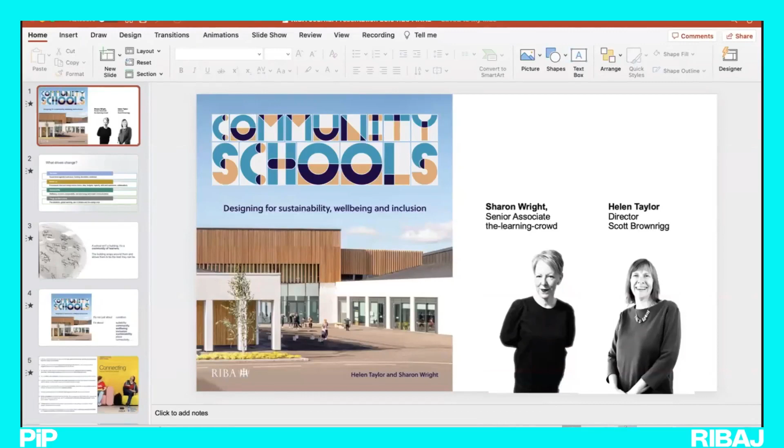Starting off today, we'll be speaking to Dr. Sharon Wright, Senior Associate at the Learning Crowd, and Helen Taylor, Director of Practice at Scott Brownrigg. Helen Taylor has worked in education design for more than 20 years and loves engaging young people in the built environment. She's passionate about sustainability, inclusion, health and wellbeing, and has worked with the RIBA, the Department for Education, and Schools of Architecture to drive design standards and communicate the importance of education spaces. She shares practice research via Scott Brownrigg's Design Research Unit and other DfE publications. And she's working on the DfE's Design Code for Schools and Colleges and is also a proud mum.

Oh, sorry, my list has gone. Hold on a moment.

Sorry about that. And Sharon Wright has spent 20 years working with education leaders, architects and contractors in the development of new learning environments nationally and globally. She's got expertise in creating the vision and design brief, engaging users in the process to make them stakeholders in design. With a background in education policy and organisational development, Sharon is a Doctor of Education from King's College London, with research interest in the history and policy context of community schools. She's a Fellow of the RSA, a UK Executive Committee member of the British American Project, a RIBA affiliate member, and on the board of Bees United, the Brentford Football Club Supporters Trust.

Bit of a plug there.

They're here today to discuss the co-authored book, Community Schools: Designing for Sustainability, Wellbeing and Inclusion. And I look forward to seeing the presentation.

Good morning, Sharon and Helen. Helen, I understand you've had a few tech problems this morning, as I indeed seem to have had. So I hope you're both there. Are you there? Yes, absolutely. Hello, good morning. Yes, we're here.

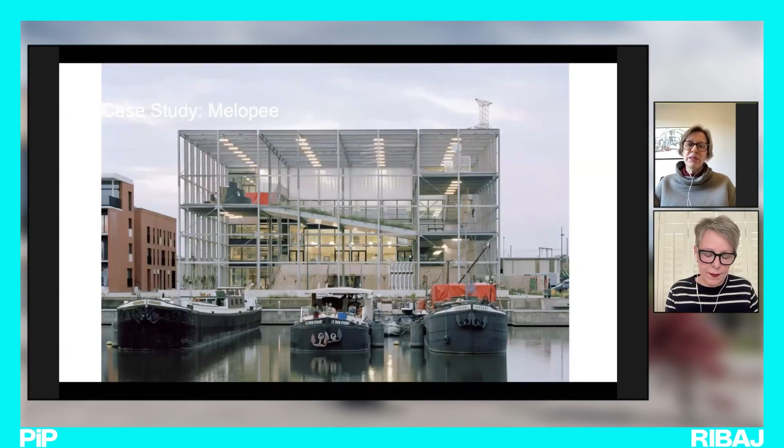We've also included some international case studies. This one you might have seen published in a number of architectural journals, Melopee by XDGA Architects. It's part of an OMA master plan in Ghent, and the first community facility of any kind in this particular area. The architects have created a really beautiful, dramatic, multi-story educational space. They had a very tight site to work with, so both the internal and external spaces are stacked, but they've been able to create a very visible community hub for this new development.

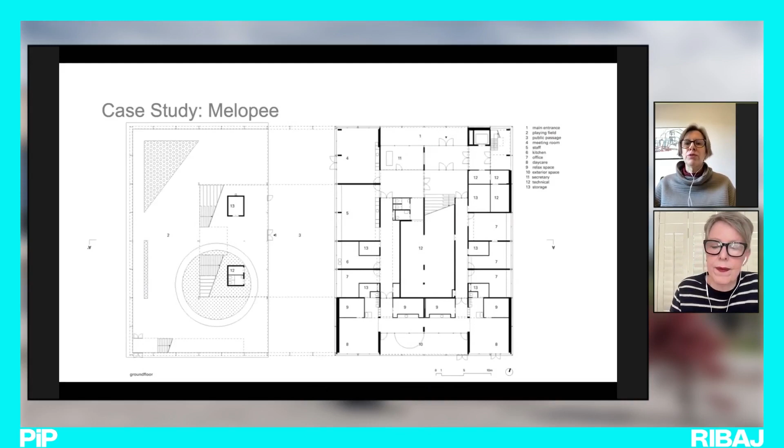They're seeing this as something designed to welcome the community in, to the extent that there's actually a public footpath running under the building, which they want to use as a jumping off point to develop the community within this area. You can see a very simple arrangement of spaces, very flexible. The architecture isn't restrained by the need to have a number of very simple, flexible spaces for the school to operate in.

At a very different scale and kind of environment, Silver Birch up in Argyll and Bute. As Sharon said, she's been working a lot with the authorities in Scotland, and one of the things they've really invested in is outdoor learning. There's a really important role for designers here in terms of creating these positive spaces for young people.

I think one of the lovely things about Silver Birch is that their vision is very much about seeing the child as a vital part of the community, making sure that children and their families have the opportunity to experience nature, to push boundaries, to experience risk as well, which is something that's quite difficult for schools to manage. But I think young people need this more and more, particularly over the last few years. This engagement with nature has a really positive impact, and I hope we'll see more of these kinds of spaces.

Sustainability is absolutely fundamental and weaves throughout the book. We're looking at sustainability as a whole, considering all of the UN Sustainable Development Goals. The current DFE standards are really starting to push this agenda in terms of climate change, and you can't separate energy use and carbon from the other drivers we need for community well-being, connectivity and inclusion. So we refer to sustainability a lot, but we haven't created a standalone chapter on it - we've woven it through because we see it as embedded and inherent in all the themes running through the book.

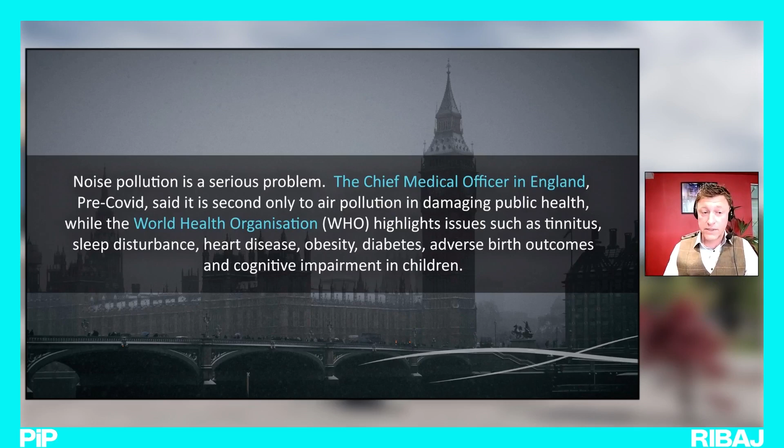Noise pollution is a serious problem. The Chief Medical Officer in England, pre-COVID, said it is second only to air pollution in damaging public health, while the World Health Organization highlights issues such as tinnitus, sleep disturbance, heart disease, obesity, diabetes, adverse birth outcomes, and cognitive impairment in children. Is it any wonder that 44% of teachers in England plan to quit within 5 years?

Anik Hussain, a teacher in Nottinghamshire, said, "Every Monday I teach lessons in a large room with only hard surfaces and hard furniture. The echoes are a nightmare and I can rarely get my voice heard. I always leave school that day with a major headache."

This exemplifies how classroom noise can ruin a lesson even before taking teacher ability, external sounds, or student behaviour into account. But is it any wonder that pupil attention is being negatively affected, resulting in poor behaviour?

One study found, on average, speech intelligibility in just the fourth row of a classroom is a mere 50%. If students can only hear half of what the teacher's saying, how can they be expected to learn and retain information? If they can't hear what's being said, it's a long time to sit without getting bored, resulting in increased unruliness. With school class sizes rising, it's likely this problem's only going to get worse.

The role of acoustics in architecture is not just about achieving optimum levels of sound. With the right acoustic solutions in place, it can actually enhance the way people interact with each other and the space around them. I'll give you a great example.

After spraying a multi-purpose school, sports and dining hall with our SoundSpray product, the head teacher, delighted with the result, reported that they'd actually been throwing away less food. It seems the hall was such an unpleasant place to be, the kids were leaving food to go and play. The introduction of SoundSpray gave them a relaxing, comfortable place to interact with their friends whilst eating. This in turn had an impact on their social development and gave them the energy levels required for concentration.

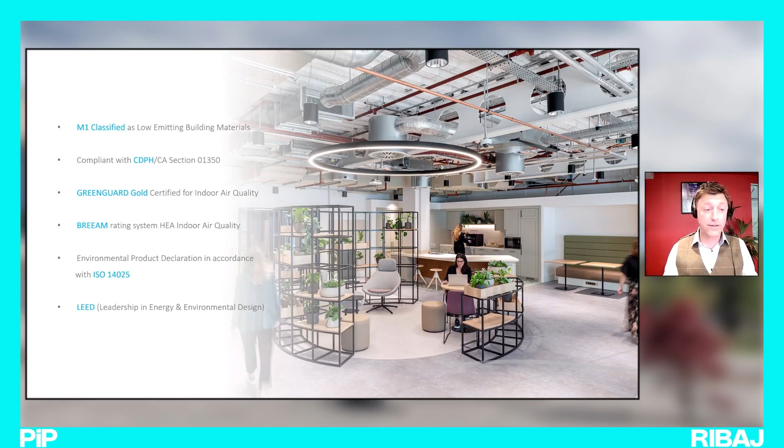The emissions of the products used in a build are also becoming increasingly important, with more certification systems dedicating entire sections to it. Our products are M1 classified as low emission building materials. They're compliant with the California Department of Public Health. They're Greenguard Gold certified for indoor air quality, also BREEAM's rating. They have EPDs and they contribute up to 17 points towards LEED as well.

Our well-being also depends heavily on the survival of our planet. So environmental qualities are just as important. Our finishes are made from high-grade recycled paper and renewable plant-based fibres with specialist water-based adhesives treated to achieve Class 0 fire rating. The range also contributes towards LEED, BREEAM, SKA, Living Building Challenge and Passive House.

All installations are carried out by our fully trained in-house teams to complete the environmental jigsaw. Oscar Acoustics are ISO 14001 certified. We're also now committed to becoming carbon negative for our entire operation and are being independently assessed by Positive Planet.

SoundSpray K13 was used at the Enterprise Centre at the University of East Anglia. This was an archetype project. It was designed and delivered to achieve Passive House standard and BREEAM outstanding rating. The outside was actually thatched as well, which really did look cool.

The project won multiple awards, including RIBA East Regional, RIBA Sustainable Project of the Year, and also Best Education Project at the BREEAM Awards. SoundSpray K13 was used throughout the building, contributing maximum BREEAM points whilst giving a finish that complemented the building really well.

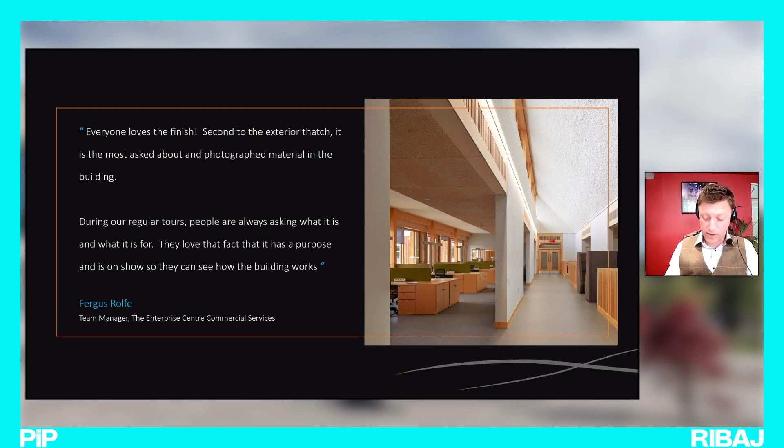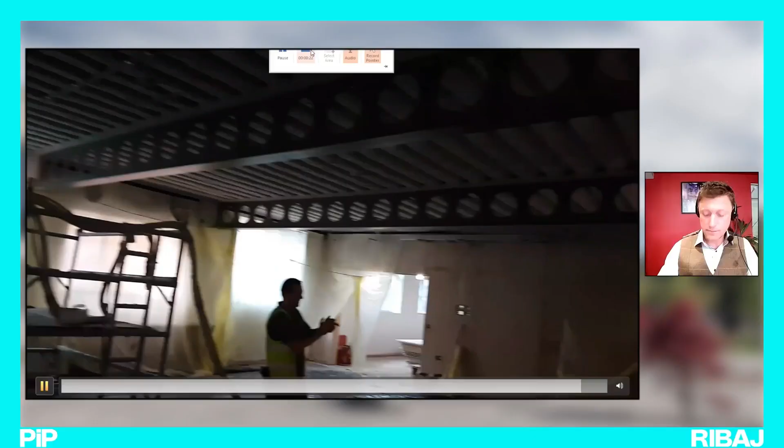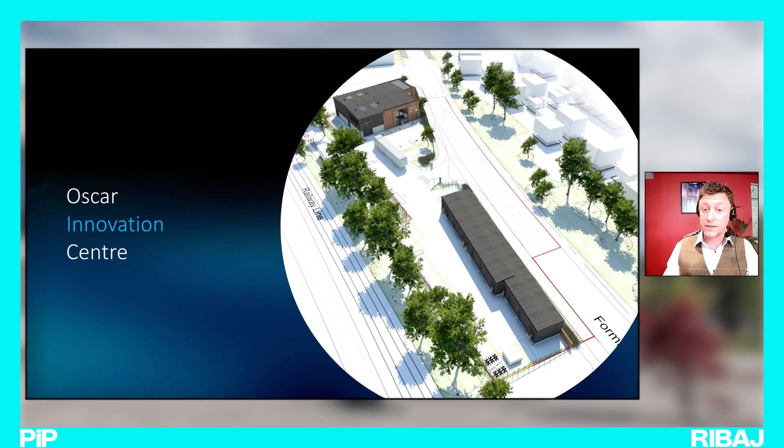So due to the popularity of the product, we've hugely outgrown our current premises and are currently building a new 16,000 square foot Oscar Innovation Centre. This comprises a large warehouse and product development facility cloaked by a brick facade hiding the warehouse from the road and the houses opposite. So I'm not going to go into any detail on this today, as I'm going to save it for a whole other presentation on completion.

But what it does enable us to do, though, is A, meet our rapid expansion needs, and B, create a brand new show home for all our products. So once built, probably around the end of the year, we'd love to invite anyone to drop by for a coffee and see all the products in situ.

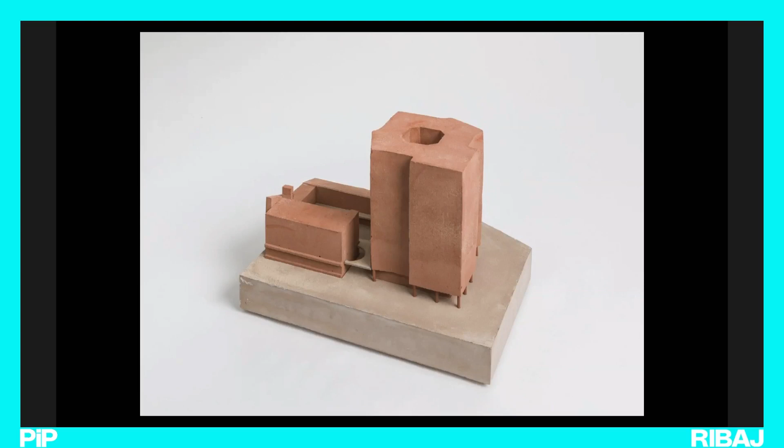But this school is an urban school on Kingsland Road in Hackney. It's actually a hybrid project of a residential building and a primary school, a 350 pupil primary school and 68 apartments. And this is the form. So hopefully everyone can see that. Yeah. Is that okay? Yeah. Okay.

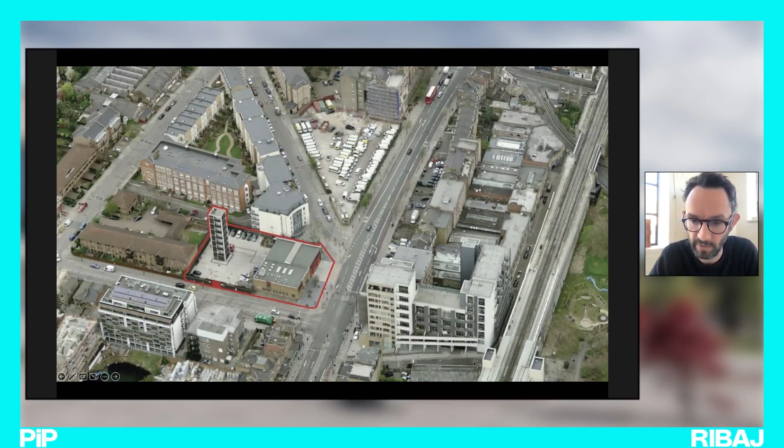And for that secondary school, the founding governors wanted to build a primary school. And when this site became available opposite, they tried to bid for it. But of course, it was a very expensive site. And so in order to fund the primary school, a sister feeder school for the secondary school, they needed to form a joint venture with a local landowner, the DfE, and a housing developer.

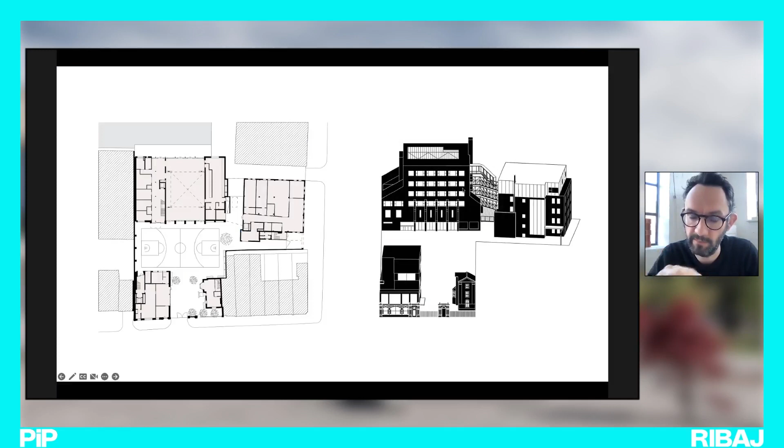So the secondary school gives you an idea of a 6-story, taller, denser urban school environment around a ball court and an existing building, which we connected via bridges to maximize amenity space in these very limited urban sites.

So moving back to the primary school, it comprises, as I say, of a point block tower which fronts onto the busier Kingsland Road to protect from the fumes and noise, and a courtyard school sitting behind it in a more protected environment.

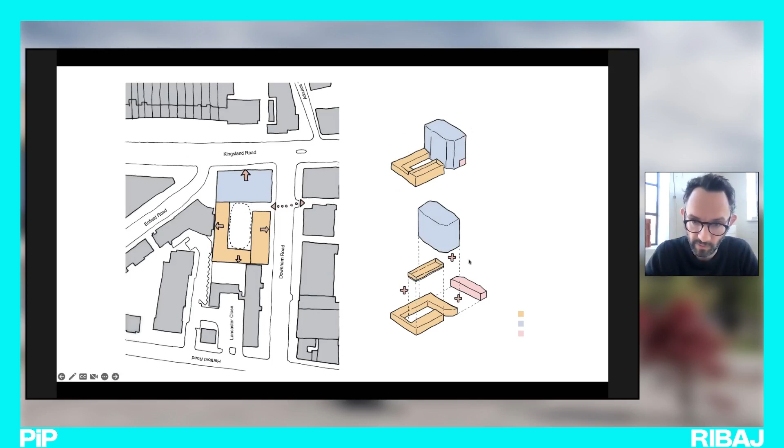Simple principles of the site were to minimize the footprint of the residential building, push it to the edge of Kingsland Road here on the left, and push the boundaries of the primary school to the edges of the site to create the maximum courtyard, basically in the center of the site, a quieter space, and connect across to the secondary school on the quieter Downham Road. And there is also a commercial space fronting onto Kingsland Road.

So very simple principles. But of course, the challenges of this urban site, needing a large residential building to fund it and pay for the site and to maximize amenity space.

And the plan of the two buildings together, you can see a large residential building with the courtyard school, which wraps around and underneath the residential building on 2 floors, providing the fourth side to that courtyard, and the entrance then on the quieter Downham Road between the 2 volumes.

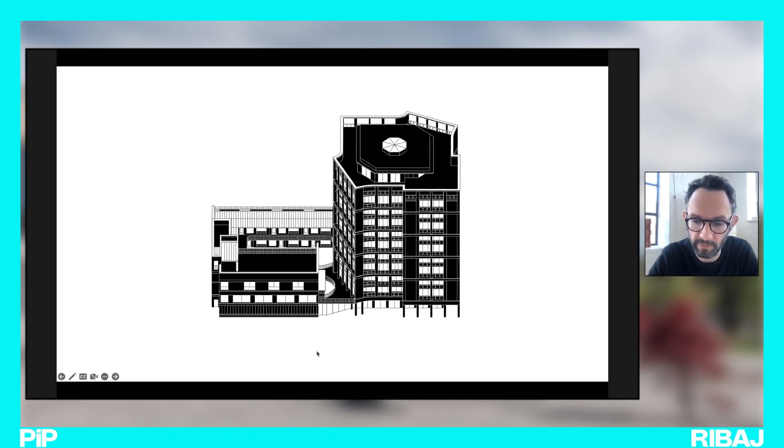So just to talk more about the school itself, the design of the school, here you can see the ground floor has the school's reception, bike storage, all of those things. And you can see the colonnade, which provides shelter for those arriving from public transport, and shade, as well as a more public gesture on the street.

Enter in between the 2 volumes, you see the courtyard, and now you can start to see these outdoor decks, which, as Carlos already alluded to, the courtyard school is formed around the courtyard with external circulation. So the only actual corridor is this, if you can see my arrow, is the back of house to storage and facilities for staff only.

So the entrance here from Downham Road, you can see this wedged space enters into a larger courtyard, and around that there is a covered deck. The hall sits close to the street, which can be used on weekends for community space activities, as well as the courtyard itself. The school was finished in 2019, and halfway through its first term, we had COVID, and so it's re-emerging more as a community building now.

But classrooms, reception on the ground floor. Classrooms are paired, loos in the corners, they're easily accessible and very visible around the central hall, and the kitchen has its own serving space on the street. Double height hall, and then classrooms rotate within the tower.

There's 4 classrooms here. All classrooms are dual aspect with connections to the city, and classrooms along the back wing are top lit down the back on the party wall between, which we'll see in the section a bit later.

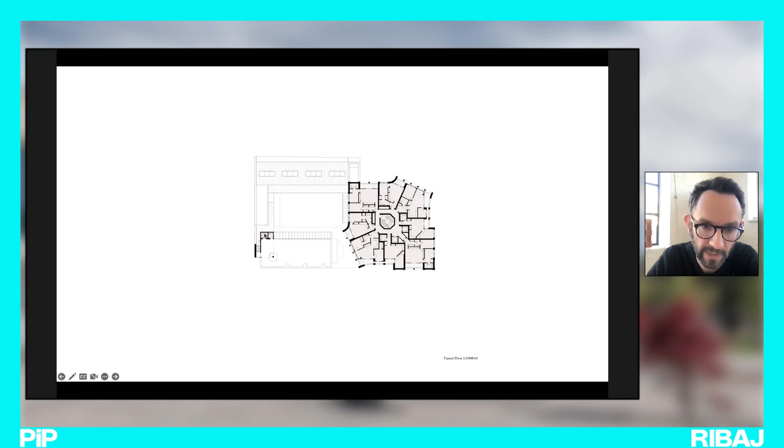And finally, the upper floor has an allotment roof garden, kind of sensory garden space, which there's been various permutations, quite flexible in terms of the curriculum as it changes. On the top level, a solid edge to it, which we'll see in the photographs in a second. So this, the courtyard school around with the residential building on the right-hand side.

So this is the entrance off Downham Road, slightly less busy, where you can see the protective entrance, the arcade colonnade leads from the right-hand side, and a public bench on the left. At this moment of transition for kids from the busy urban city outside to the inside, we collaborated with artist Paul Morrison to come up with a scene of his choosing to create that kind of transition from the outside space to the inside.

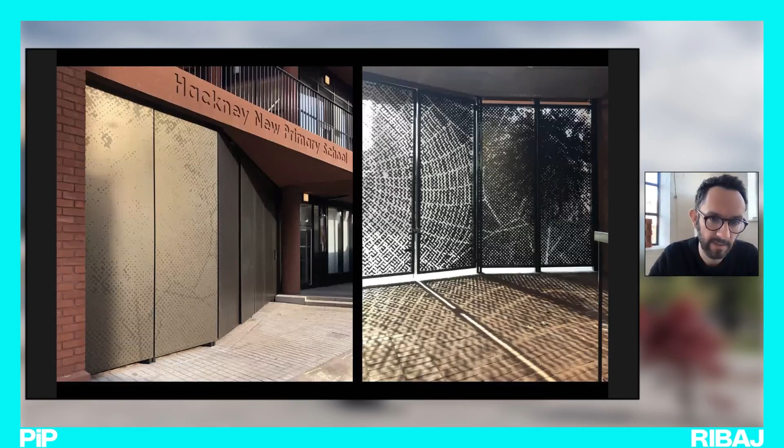So on the left, you can see the quite solid perception of the gate. So it's protective, safe, secure, not overlooked into a school at street level. And from the inside, you can see the kind of light, more in tune with Paul's monotone artistry. And then from the inside looking out, kids are very well aware of what's on the outside street, but feeling protected inside. And this kind of animation of an Alice in Wonderland moment from the outside to the inside.

And all stairs and circulation space are also external. They're covered with external light from above here. And this is what we call the residual apse off of the hall, bringing light from above. And these spaces are not just transition spaces, thresholds between the outside and the inside. They're fully utilized once the school gates are closed. At 8:30, kids use these spaces as smaller breakout spaces from the larger courtyard, in smaller groups. And even between columns, you can see they inhabit every last inch, the challenge being maximizing all sorts of amenity space.

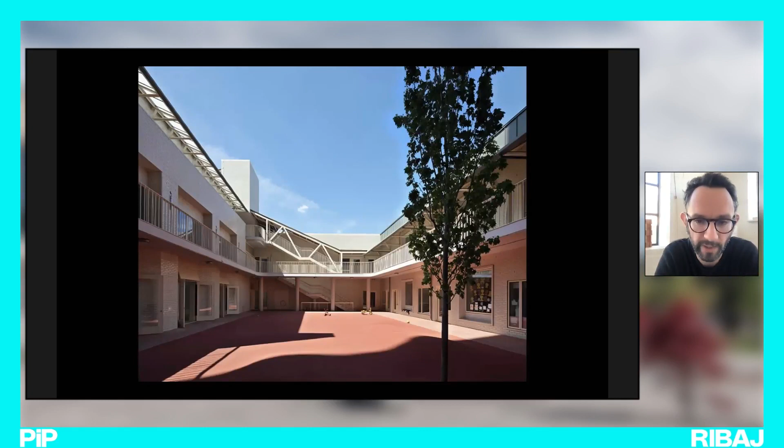So then looking back as you progress, the school occurs in a kind of episodic manner from the street to this entrance court, and then beyond you can see the courtyard, which is a very different character of a lighter glazed, off-white cream ivory brick, different patterns and a more muted color, reflecting more light, but also letting the children animate that space. And there you can see the covered external spaces at ground and first floor level, and the connection up to the roof garden in the background.

And so I'll give you an idea of that different character, different space inside. The staircases are covered external. Kids are refreshed from the classroom, moving to the halls and various other activities, and a kind of nod to the fire station in some way in the expression of these buildings and the canopies.

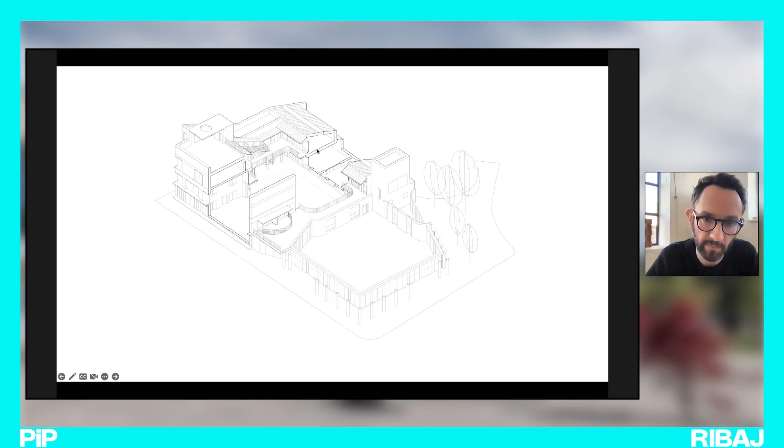So talking about how the school works, you can see in this cutaway section, we have the large hall on the street, as mentioned, the roof garden above, classrooms, and you can start to see the profiles of those spaces. But the school building is sustainable, it's economic. By removing all of those internal corridors, we were able to reuse that area for 4 additional music classrooms. I did mention that the pedagogy at the school was this focus on music and more one-to-one learning, with slightly smaller class sizes of 25, who are taught in pairs.

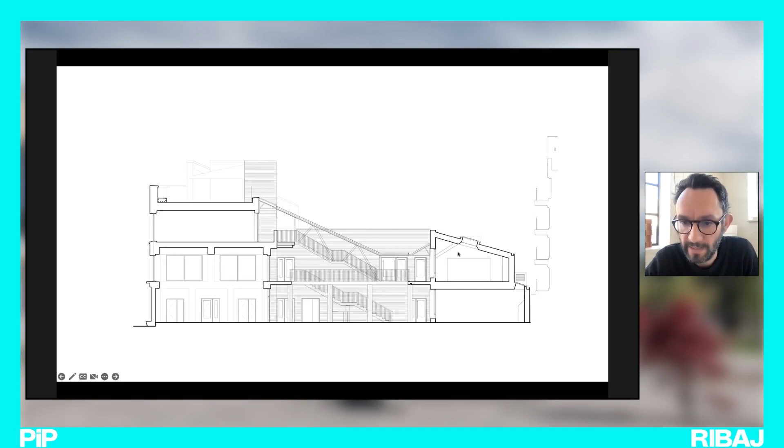But here you can see the clerestory hall, naturally ventilated from the courtyard side at top level here, and actually that hall is ventilated through the school roof. Classrooms are above that, again dual aspect, and those that can't be dual aspect, the reception class here, are top lit at the back, with openable roof lights or north lights to prevent overheating.

So key features of the classrooms and the well-being of those environments are the dual aspect, north lights. They have shading devices, canopies to prevent overheating in the summer, and warm, comfortable temperatures in winter, augmented by MVHRs for those 4 classrooms here on noisier streets.

But one of the remarkable pieces: the external canopies and shading devices allowed this school, at 40 degrees last summer, to be one of the few schools left in London that remained open, and the teachers and head teachers described it as a calm and cool environment. So whilst there's investment in heavier masonry and concrete carbon structures, we feel this is a long-term investment, very low maintenance, very low technology, but performing really well in mitigating climate change.

So here you can see that environment, the shading, canopies. They also serve to prevent overlooking, of course, from the residential building above us. And then breaking that down classroom by classroom, just to talk a little bit about the composition of each classroom. You can see this large picture window, which is the bench set into a wall, a flush window on the right, which is an internal bench on the inside. You have the door and stable doors for teachers to welcome parents in and out of the courtyard without little people escaping, but also, of course, additional fresh air when needed.

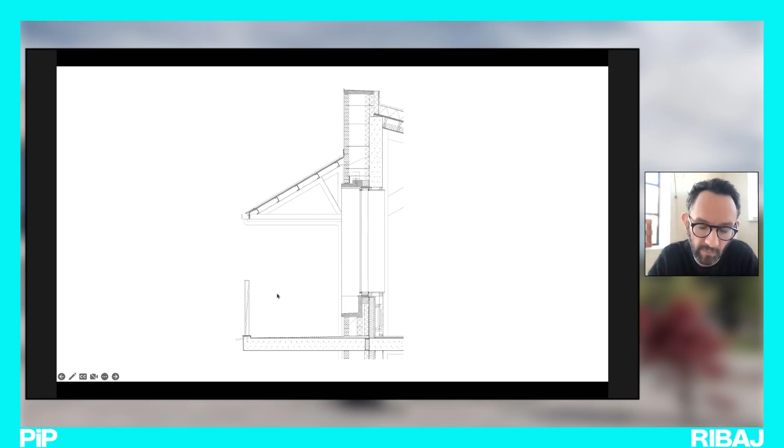Exposed elements, so kids can explore and learn from how things are constructed, but it's very elementally put together, a bit like railway buildings, back-to-back angles, and so forth, and generous walkways where kids can line up or walk past comfortably amongst each other.

This is a cross-laminated timber structure for the pitched roof elements. Most of the other roofs are flat roofs to provide as much additional amenity space as possible. Here, where we're related to the neighbouring courtyard, we have a pitched roof providing natural light from the top.

The back wall is a full acoustic wall. The concrete here is painted to provide a different character of atmosphere to the non-general teaching spaces. Again, exposed concrete, thermal mass, and larger special rooms for that music element.

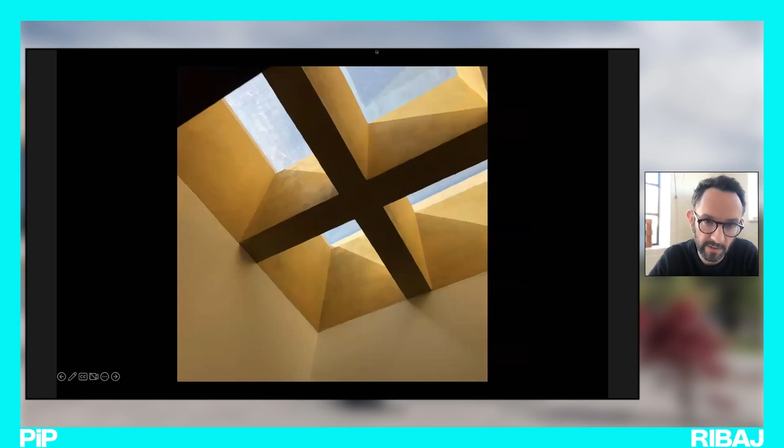This is the roof lights on the SEN rooms. And then this is the roof garden element as you arrive up to the top level of the school, with the residential building in the background.

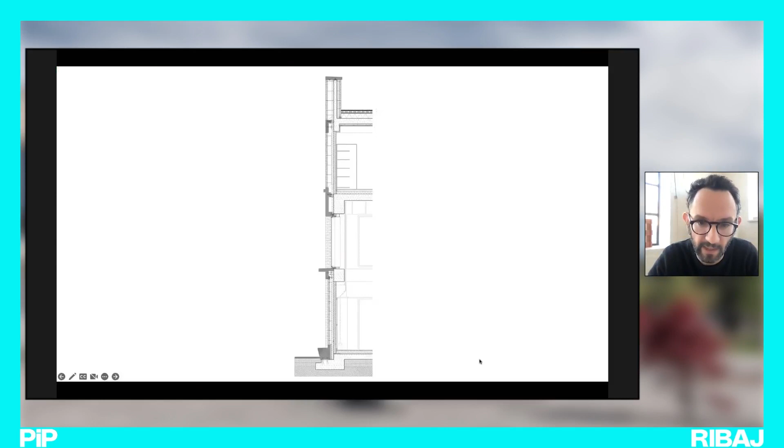So we created this public, very simple moment on the street, a bit like a chapter house, and these kind of almost mini seats along the edge of the street, integrated into the fabric of the building, shading, seats.

There's the detail of that and how people wait and just enjoy this very thin extra bit of threshold to give back to the street in a civic way, whilst the rest of the building has this robust, long-term kind of civic quality, belonging in a very harsh urban environment, but that can take it and need very little, if any, maintenance, but also providing a very important gesture and entrance to a school.

And this is the counterpoint to the bench in the good weather, to have a place for when wet and waiting. And so this is the building in context.

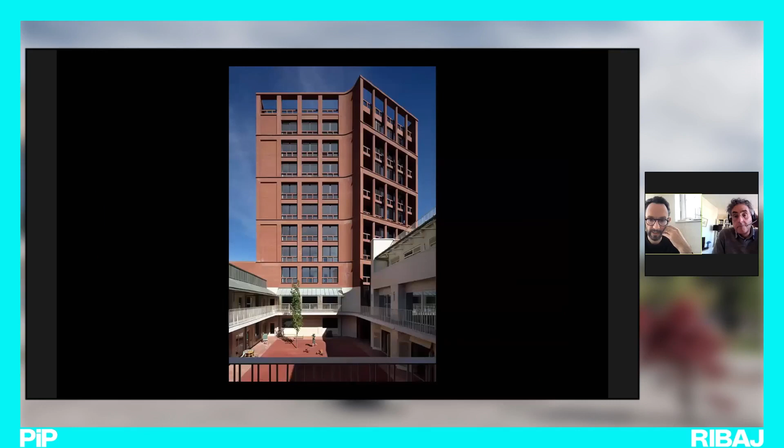You can see the school sitting behind it, quite a large bit, but to show that, I guess, we really feel these things can work in harmony, particularly in an urban environment, this hybrid development, where we feel in that joint venture the school really got a really good fit out, really good quality spaces. Maximizing amenity is the challenge, and relying on other spaces, of course, in the forest schools, etc., and other programs.

But clearly they can survive together in the city environment. And just to finish, you can see that this moment before the gates open, the school really does belong to this community and gives back itself, as well as its use and potential for teaching and adult learning within that space. It certainly feels it belongs to the community. And this is a very outward-looking school in this environment.

So I'll just finish with a quick video giving an insight into how the people who actually use the space work. Thank you.

So we're standing in the courtyard in the middle of the school, and behind me you can see the apartment building. The two things were part of an equation that made both possible. A school was never going to be able to purchase a piece of land of this size, and so here, the housing funds the school. So in a way, you've got two completely different types of buildings fused together in a hybrid.

The feedback when tenants first moved in was extremely overwhelming. People were just really, really happy and pleased because of how the development looks, the layout of the flats. It's a bold design, the red brick and the facade of it. It's very attractive to a lot of our tenants because of how it looks. It's very definitely a landmark.

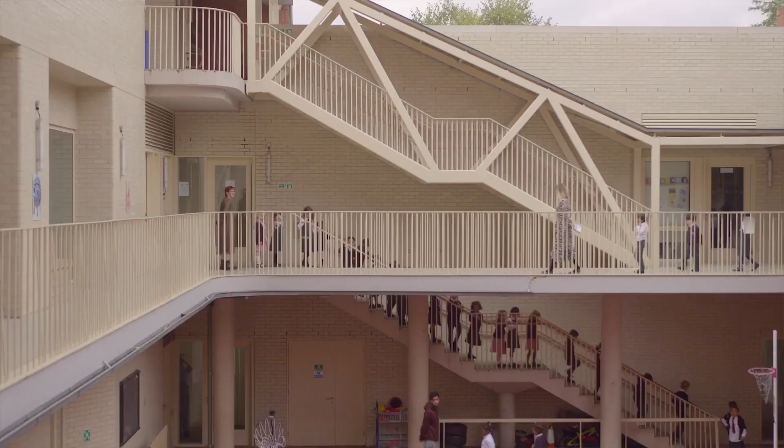Children can have their own space where they can feel calm and secure. There are spaces for them to be able to just sit, reflect, read a book, but then there are also spaces where they can run around. Some of our children do not have access to gardens at home, so for us it's very important that all of our children are connected with nature. They're in classes where they can constantly look outside. They walk out of the classrooms and they're immediately out in the open.

One of the joys of not having corridors is we've got galleries and balconies and open staircases, and they're all places to play. Part of that constellation of spaces - outside every classroom there's a little bench, which allows us in a way to inhabit the wall. Part of it creates a reading space on the inside, part of it's pushed back and creates a bench on the outside. We just imagine that as another place to play.

It's a point in a child's life when they make friends, and as a parent, you make friends through your kids' friends. So we just made a bench, and at the end of the day, parents sit on the bench and talk to each other. So the school is kind of working as a piece of social infrastructure, other than just being a school.

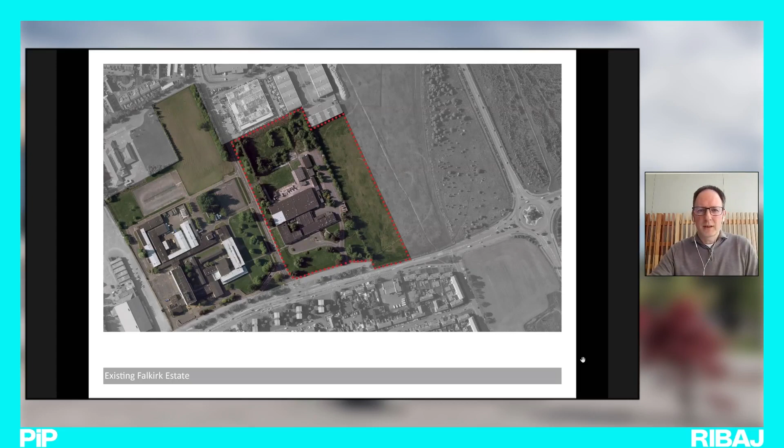The site at Falkirk that we were presented with is split in 2. On the right-hand side, that's the site we ended up building on. On the left-hand side is the existing campus, the existing Falkirk estate, which was developed in the 1960s - a relatively fine building in its time, but had really come to the end of its life, riddled with asbestos, and had developed into quite a big rambling campus.

The site we've got is on the periphery of Falkirk, but Falkirk itself is actually quite a small town, so it's still relatively straightforward in terms of its connections to the town. It's very walkable. The town's off to the west there, with Falkirk Stadium off to the east, and then the views towards the north and the Kelpies and the Ochil Hills, etc., are quite an expansive outlook.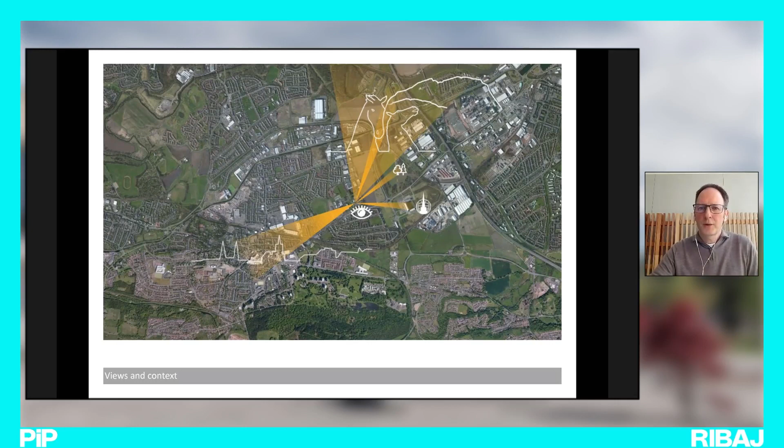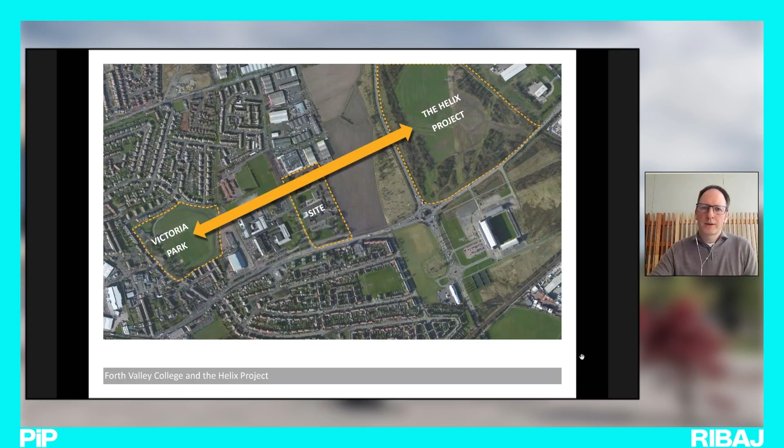In terms of the overall sizes, the Falkirk campus is the HQ. So Alloa specialises in business, Stirling's hospitality and creative industries, and Falkirk is really STEM sciences because of its location adjacent to Grangemouth and the petrochemical industry nearby.

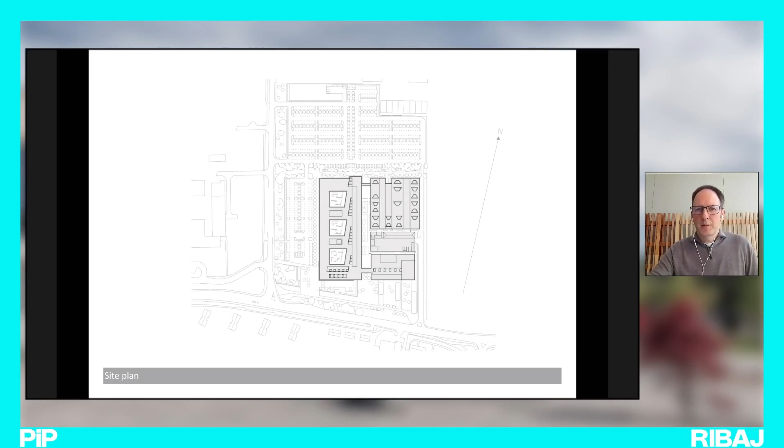And that's how it stacks itself up on site. We brought the building to the south of the site so that it had a presence. The main drag into Falkirk is at the bottom of the page there, from the M9. And in doing that, we engage the southern part of the building with the streetscape, but also provide masking to the relatively extensive car parking that came with the brief, and managed to mask it at the same time by arranging it to the north of the site.

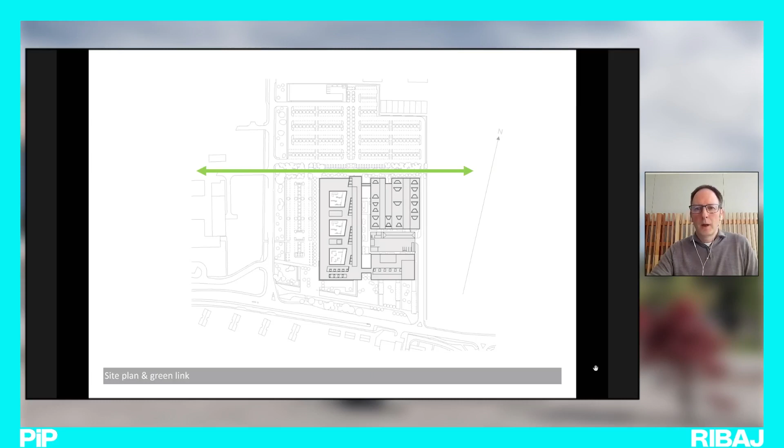And then driving that green link through our site, so creating the first section of that green link in effect for others to link into as the sites develop either side of us. In terms of the ground floor plan, that's how it stacks up. So it's 3 main sections. As you can see, it sort of divides up relatively logically.

So the southern aspects of the building are the public areas. So all of the functions that are to do with community, like the library, the sports spaces, the entrance, flexible learning spaces, all address themselves to the southern end of the site. And so we've maximised the glazing in this area to create that sense of connection to the street and animate the facade, so you can see the activities that are happening, facilitating that with the large precast cantilevered elements that provide solar shading.

So in that part of the building, you've got things like hair and beauty salons that the public are encouraged to take part in and become welcome guinea pigs. Also sports provision, so the gyms are open to the community as well as teaching facilities. And we've also got things like our dining spaces and all of the social spaces that are at the heart of the building. And then just slightly further up, the general teaching spaces.

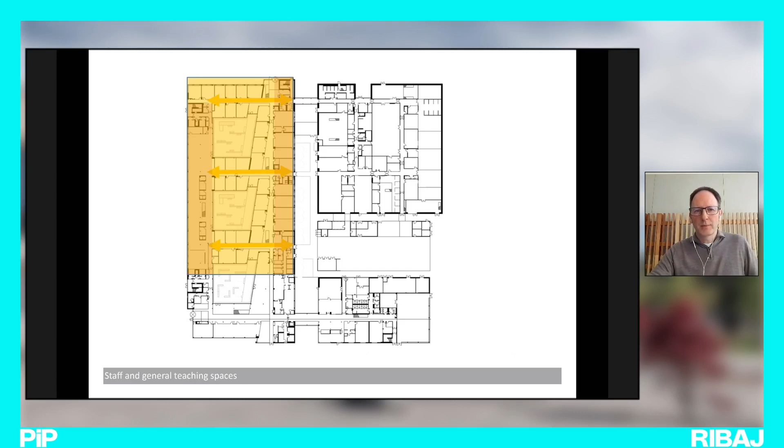So on the very left-hand side, the darker orange stripe is the staff space, which arranges itself over 2 floors. And on the right-hand side, the darker stripe is the specialist teaching, with the general teaching finding its way in between. There's quite an interesting relationship: the students are always able to find a member of staff. So the proximity to the places where people are taught and where the staff work was quite an important driver there to make sure that there's maximum connection. And that's really how that teaching block, if you like, expresses itself.

So it's a handmade Danish brick, and the structure is clad with precast concrete, and the glazing in ribbon windows really to maximise natural light into all the spaces. And some of the teaching spaces that accrue from that. And then again, the workshop areas. So all the dirty, messy, dusty things that workshops tend to be are all coalesced into this building.

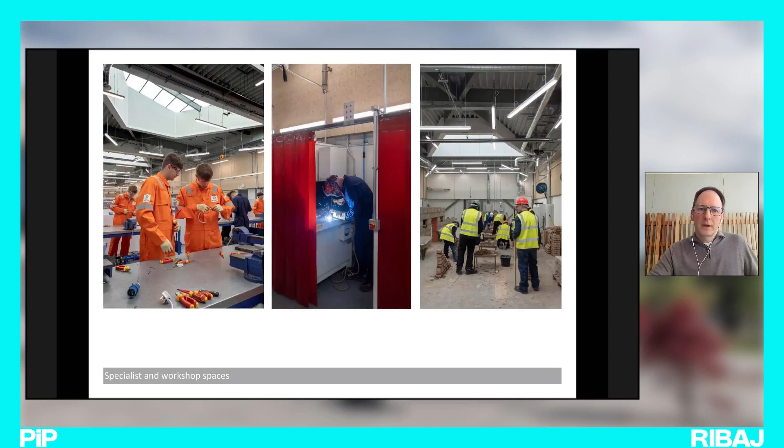And we've given it a kind of industrial character using an anodized aluminium rain screen panel product that clads the workshop and gives it a separate identity. And you've got all the things that happen in workshops like welding and bricklaying, you name it, happens here. As well as serving the petrochemical industry, the flexibility that we have to employ in the building to meet local industry needs is a key driver for the design of the building.

And then dropping in the courtyard so that we've got access to daylight and natural ventilation. The majority of the building's naturally ventilated with a few areas being mixed mode. And then dropping those courtyards, giving the opportunity for breakout as well. And we're quite lucky to have quite a lot of mature landscape as well. So a lot of mature trees that we've managed to retain. We didn't have to take too many trees down to create the building. So we've got a ready-made landscape, if you like, that's bedding in quite well.

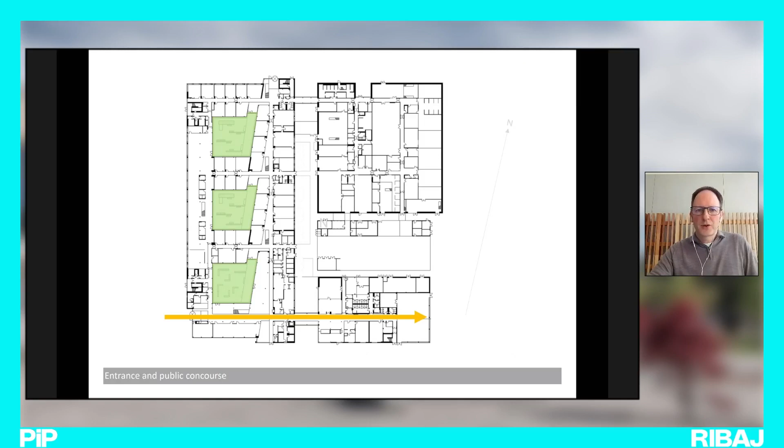And then in terms of the approach to the buildings, there's a main east-west concourse that brings you into the building, and a north-south student street. So just some shots of the approach into the building from the main entrance into a double height entrance space that opens up into quite a voluminous, welcoming, open and airy space that's got light from all levels. On the ground floor there to the right, that's a flexible learning space.

The glass partition there completely folds away and is tucked away so that this can be used for a variety of different purposes. And actually the college used it for a vaccination centre. They had about 300,000 people over their 3 campuses. And the principal was absolutely delighted because it was, he said, the best open day that he's ever had.

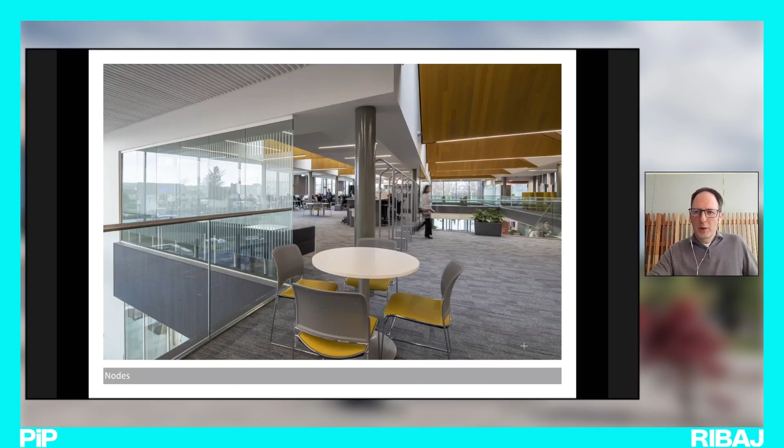And then that north-south student street with breakout spaces, creating those little nodes as you come down the street. Similarly, the groupings of vertical circulation, stairs, lifts and toilets all have the same motif and aid with orientation. And also we're carving openings into the floor plates to bring natural light down. It's a 2-story building, so bringing light into the plan through top-lit spaces is a key motivating factor for the design.

And then effectively borrowing circulation space and repurposing it as learning space so that there isn't really a distinction between class and... It's a relatively well-trodden path, the breakout and circulation; every part of the college really becomes a circulation space. And just finding these little moments, even areas under stairs where you've got a natural little eddy space that we can use for learning.

And then in terms of making, the area that we're in is a sort of alluvial landscape. An area just to the north of our site is called Skin Flats, a wonderful corruption of Schoen Flats. As local tradition says, Dutch merchants came up and were so taken by the beautiful low-lying landscape, it reminded them of home, so they called it Schoen Flats. And we managed to corrupt it into something not quite so beautiful.

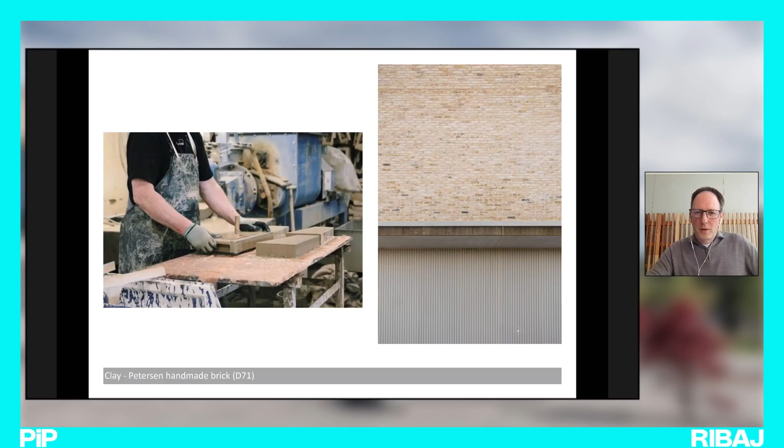But that alluvial landscape is brought through in all 3 buildings, and we quite like the idea of that handmade brick, that sedimentary aspect being brought into the buildings. So choosing a Petersen brick was a really fundamental decision, because we're not doing too much with the buildings. They're quite restrained facades, really. And that runs through into the structure as well, because the structural engineer described the site as a thin crust on top of 30 metres of soup.

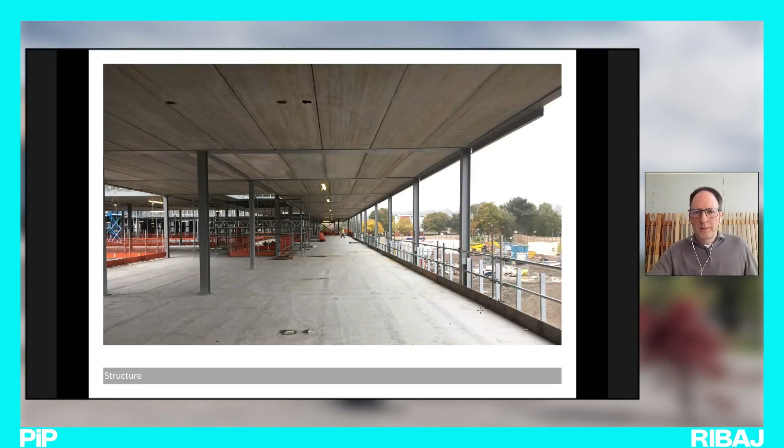But if we were being honest, similar to the project that Noel was describing, this was designed in 2016, and I think our thinking's come on a wee bit in terms of embodied carbon in particular. We're doing a very similar thing in other projects where CLT's been considered as an alternative to the precast solution. It is a very standard kit of parts, a very commercial construction. It's the way we've managed to drive the costs down. We've probably got about £2,500 a square metre on this, which was pretty good. We've managed to enclose a lot of space.

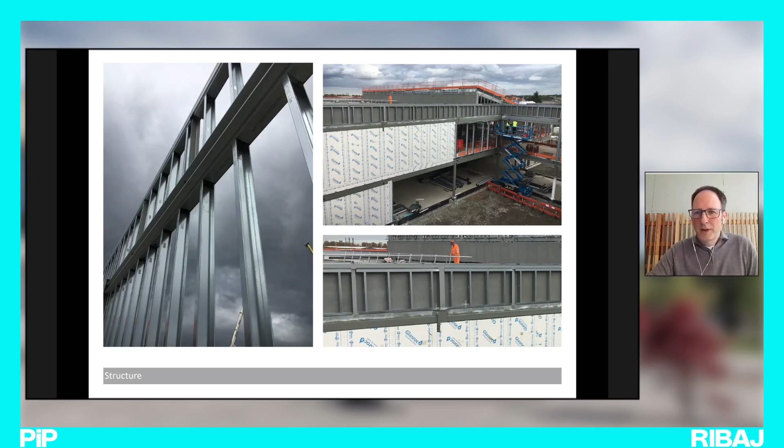So using an SFS in between that steel frame, cramming it with insulation, and then covering it with even more insulation to get good fabric U-values. And looking at some of the details, that's the precast pilaster in front of the columns, created at the same dimension as the handmade brick, to keep a really fine detail between windows. The parapet details are probably quite interesting. We've kept the parapet flush with the brickwork, but introduced a lead drip that throws water off at the head, to create a really sharp line at the top of the building, which is pretty successful.

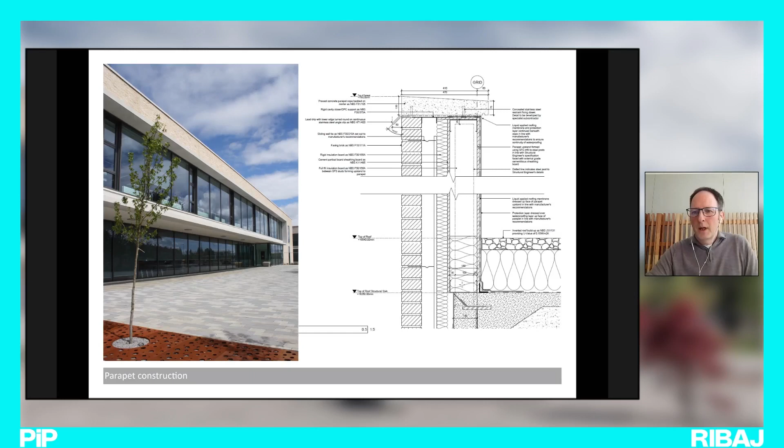We had a worry about this insulation because we've got a parapet made of studs, and we were concerned whether that would be a thermal bridge. So we commissioned thermal analysis of the roof, and it showed that actually the studs aren't the problem, but the steelwork is, the columns coming through. With a little thermal break there, we could probably have taken that problem out of the way. And in terms of the workshop construction, again as an expedient measure, we've used a structural rain screen panel that spans from bottom to top and doesn't need any other support.

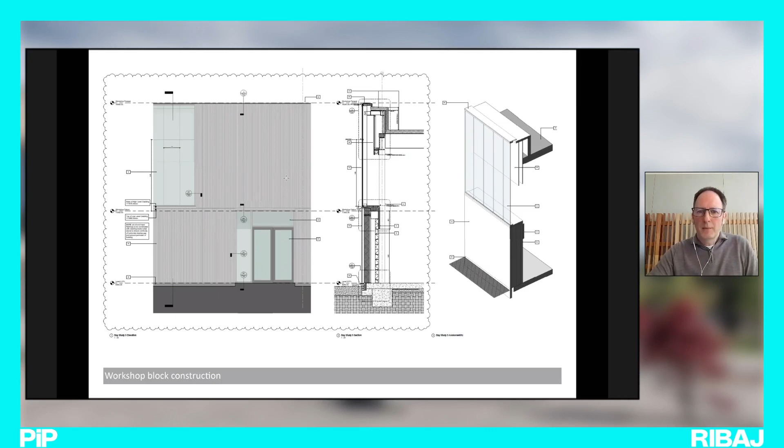And on top of that, we've used the Norbull extruded anodized aluminium cladding as a rain screen element, and that's the rain spanning top to bottom with the horizontal rails before it gets clad. And then that's just a wee diagram showing how it all stacks up, how we've separated the thermal line from the structural line. And the block work on the inside is really because of the longevity and durability needed for the workshop activities on the inside to keep things from getting damaged.

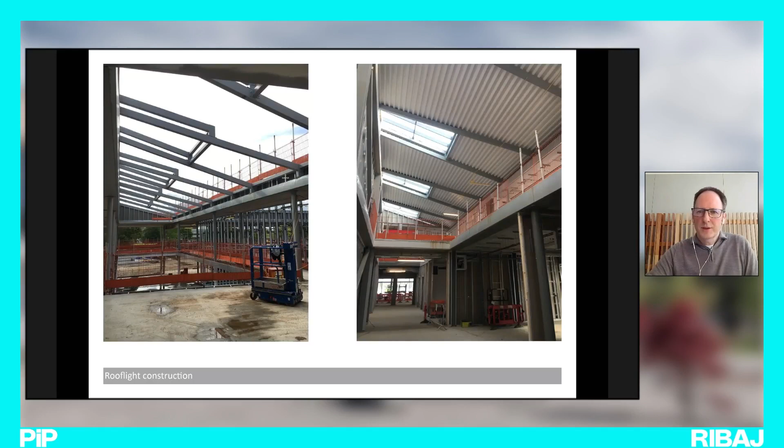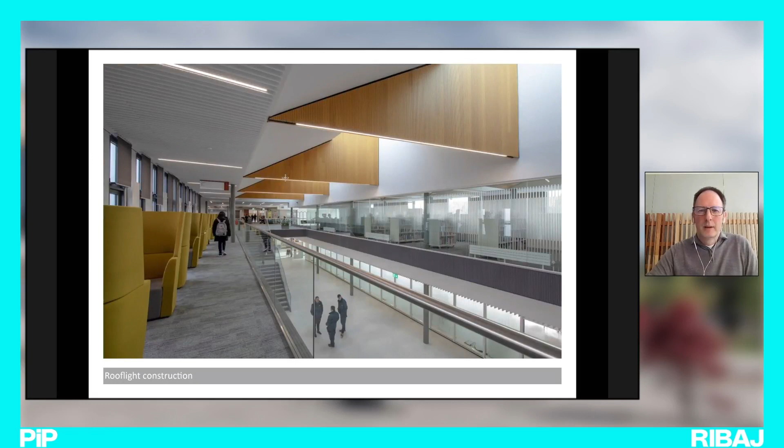And then lastly, just in terms of the roof lights, we've obviously employed quite a lot of roof lights because it's a low-lying building. Bringing light down into the centre of the plan and animating circulation spaces was a key driver. So the sawtooth arrangement that you would have seen on some of those previous images, and just showing how that was constructed with the steel spanning completely across the space, and then covering with the decking, the plasterboard elements on the right, and then this really amazing, almost reminiscent of shipbuilding, which is quite appropriate, before it receives the Valchromat cladding, which is a through-coloured MDF that's really hard wearing. We've used it on circulation spaces as well.

And then the last diagram is the workshops, where we have a similar treatment, where we've brought natural light down into the workshop spaces, and we've used the fact that the cross-bracing steel elements create this kind of triangulated form in the workshops. And we've maximised on that by effectively using that space to bring these trapezoidal roof lights and top light down into the spaces. That's how some of those are shaping up in the workshop spaces. That's it, really. Thank you.

Thank you very much indeed, Mark. Lovely presentation. I'm really inspired by the interiors and the way that there's so much modulation of even the circulation spaces, which in most cases are very prosaic, but the way that you draw people through the space by widening all the time. The space is always widening out as you pass through it, or narrowing down. Yeah. And so creating that lovely modulation of space as you pass through.

I'm intrigued, just because you started with it, by the notion of civic quality, which seems to ride through an awful lot of your work, and the way that you talk about this south entrance, which was obviously the way that you address the city, but that perspective notion of the crossing through from Victoria Park to, is it the Helix space on the east? And I just wondered, how far could you as architects go down the road? Because I know that all of your workshop spaces are on that north side, but there's always that idea that you wanted to create or encourage people moving across from one part to the other. And I just wondered whether you put serious thought at any point to making that engage more, even though there's no engagement now, that there might be prospective future engagement with the public at that point.

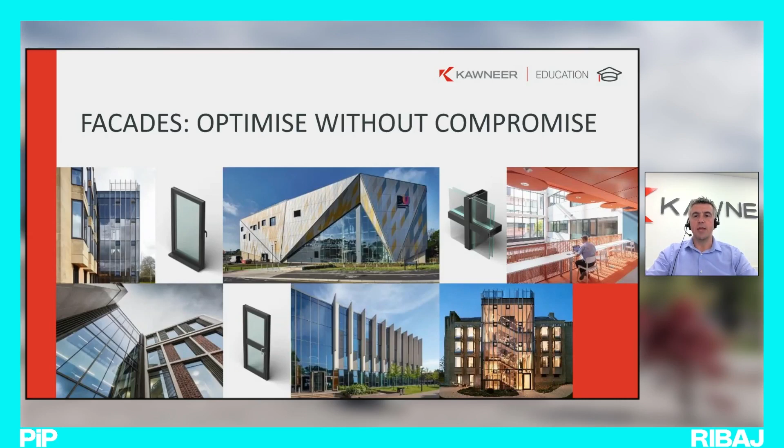Our talk this morning is Facades Optimised Without Compromise. Essentially, how a best value approach can positively impact the project budget. We do have a couple of learning outcomes for today, hopefully. So to understand the core Kawneer products suited to the education sector, to evaluate key design considerations that offer best value whilst maintaining performance, to ensure products are correctly specified through early stage engagement, and to consider the full life cycle and sustainability credentials of aluminium.

So, a little bit about Kawneer, first of all. We were established in 1906 in the USA by a Kansas-based architect known as Francis Plym. From those early beginnings, Kawneer has grown to become a brand recognised by architects, specifiers and consultants all over the world. We are a leading facade system house and have had a presence in the UK for over 50 years. We design and manufacture highly engineered aluminium glazing system solutions. And we have a comprehensive portfolio of facade products, including curtain wall systems, windows, commercial entrance doors, and framing systems.

Strong mechanical properties of aluminium, combined with our engineering expertise and design ingenuity, make our building systems the perfect solution for the education sector. From primary schools to universities, we've built up a well-established and successful track record in this sector. We're able to offer multiple areas of differentiation, including our range of high-performance and robust products that have been specifically developed to fulfill the technical and commercial requirements for a building envelope in the education sector. So whether you're looking for a cost-effective casement window or a robust entrance door, all the way up to a thermally efficient passive house solution, we have the right product choice and combination for your next education project.

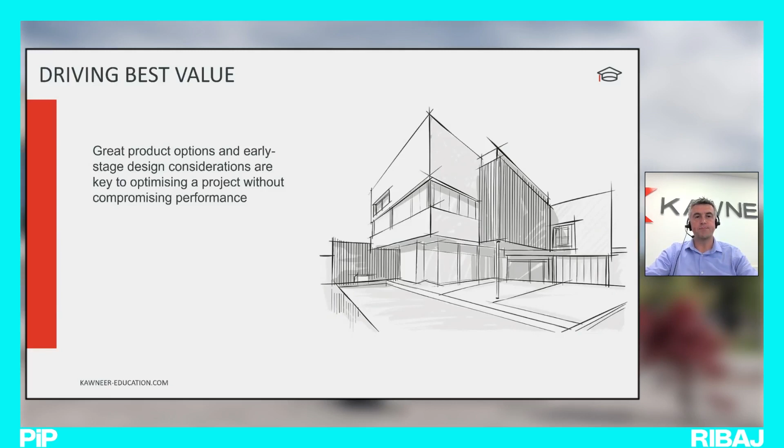Let's start with the doors. And I've done this deliberately because doors are often left to the end of the decision-making process. And this is where problems can arise. Every door opening on your project needs to be assessed on its own merit. And the key takeaway is not to attempt a catch-all approach. Doors need to be specified based on function. They could be panic release doors, security doors, high traffic main entrance doors, storerooms, stockroom doors, etc. They need to be assessed for the frequency of use, otherwise known as the category of duty, and also encompassing security, safety, exposure to the elements, just to name but a few.

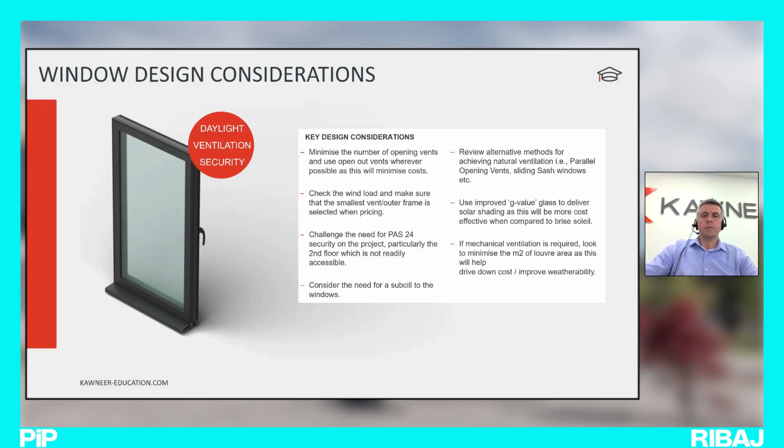And the third product range, in conjunction with the doors and windows, are the curtain wall systems. Curtain wall really is designed for multi-story applications. So it's quite common to see that in education facilities such as large main entrances and where floors span more than ground and first floor. Again, when you look at a curtain wall system, these back boxes, which are known as the mullions vertically and the transoms horizontally, the depth of that box is directly proportional to its strength under wind load, barrier load, etc., and its ability to carry glass weight.

We use zoning of wind loads to calculate specific box sizes as you move around a building. So if you've got an application where you're doing a full curtain wall wrap or a full curtain wall to a complete elevation, the wind load will vary across that elevation. It'll be higher at the corners and lower as you get towards the center of the screen. So by harnessing the specific back box that's required, by looking at reinforcing profiles just in the areas they need to be reinforced, you can actually bring about not just a cost saving, but you're using less aluminium.

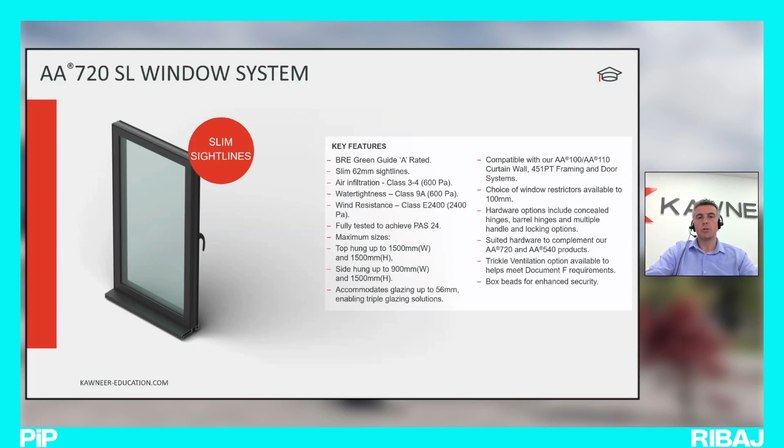As you'd expect, it's fully tested to all weather performance and security requirements, capable of large sizes and triple glazing, and it suites in with the other products so you can fit it seamlessly into the curtain wall and framing systems. There are lots of different hardware options, and trickle ventilation is available. We've packed a lot into a very efficient product, both in terms of cost and performance.

In terms of curtain wall, you'll see numbers of different systems within the Kawneer range, from stick curtain wall systems all the way up to unitized. But the AA100 remains our number one curtain wall product for the education market, primarily due to its very slim sight lines, only 50 millimeters. Thermally, it gives you options all the way up to passive house certification, and it's fully tested to the most severe weather test requirements in Europe, the CWCT Sequence B test.

The most popular choice is the zone drained option because of the ability to optimize the profiles. It's a fully pressure equalized system, and all of the drainage is concealed either behind the horizontal or vertical base cap.

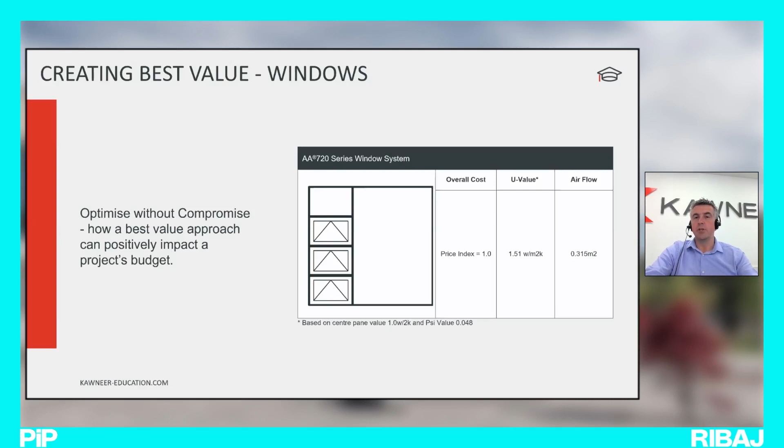We're going to compare this 720 system with 4 others: the 720E, the 720 parallel opening vent, the lighter weight 540 system, and the vertical sliding sash window system. As already mentioned, our architectural and technical support teams are on hand to guide you through this and look at potential options you may not have previously considered. I should point out that all of the windows on this page are limited to 100 millimeters, which is what we do as standard for education facilities.

So if we look at the first window, we'll see that the price index is at 0.7 based on the previous window. Primarily, this is because you're replacing 3 vents with 1. It also offers a better U value, but it's slightly down on the airflow.

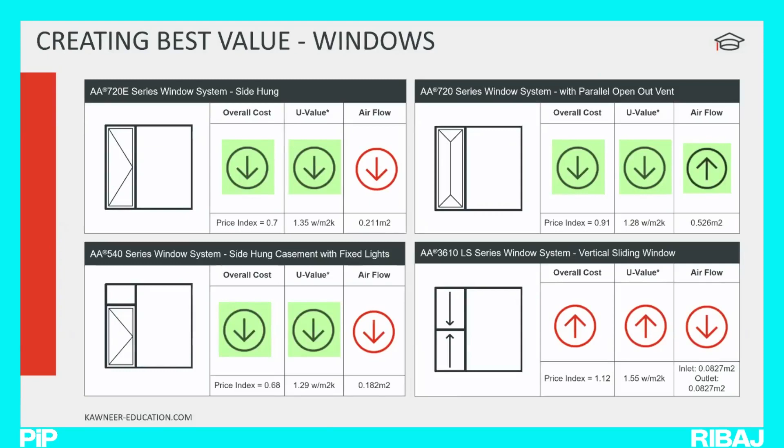The next window system is the parallel opening vent. Rather than the window pivoting out from the top or side, which is the traditional way of doing things in the UK, this vent opens in a parallel manner to the surrounding frame. The whole vent pushes outwards and you get ventilation around all 4 sides. Whilst this window is more expensive than that one, it's still cheaper than the previous example with the 3 vents. It offers a much better U value and a much increased ventilation or free air figure.

The 540 system again brings about a more cost-effective solution. This is comparable to the 720E. It gives a better U value than the previous window example, but again the airflow is slightly down.

But when you look at these side-hung vents, even these are providing benefits. The previous window contained 3 vents, this only contains 1.

The sliding sash window is more of an older design, and as you can see, it's got a higher cost and it doesn't perform as well in terms of the U value or the airflow.

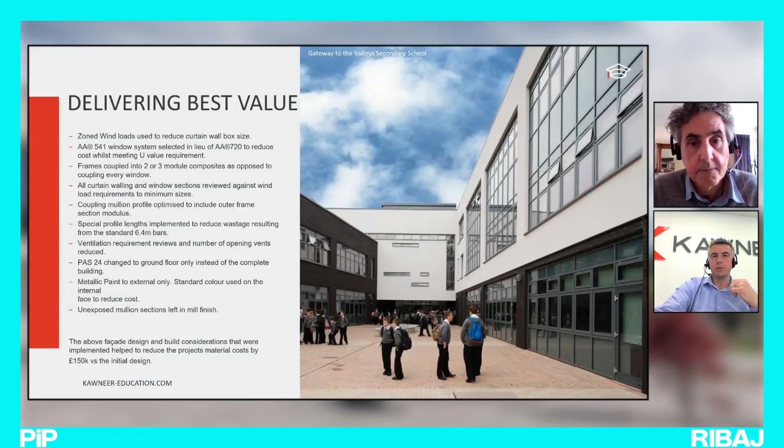So we look at all of these aspects to try and deliver best value on the project, and there's some examples as I run through here now, with comments we've received back and case studies that you can look at on the website. All offering very, very different aesthetics, but all achieving the requirements of thermal performance, ventilation, security, and others.

In terms of sustainability, I'll quickly add that Kawneer is one of only a few aluminium suppliers that have secured BES 6001 for responsible sourcing. We have life cycle assessment for our main products, including the EPDs. And sustainability is not just about the products themselves. In terms of our manufacturing site, we are reducing our environmental impact all the time, which then feeds into the life cycle assessment and the environmental product declarations.

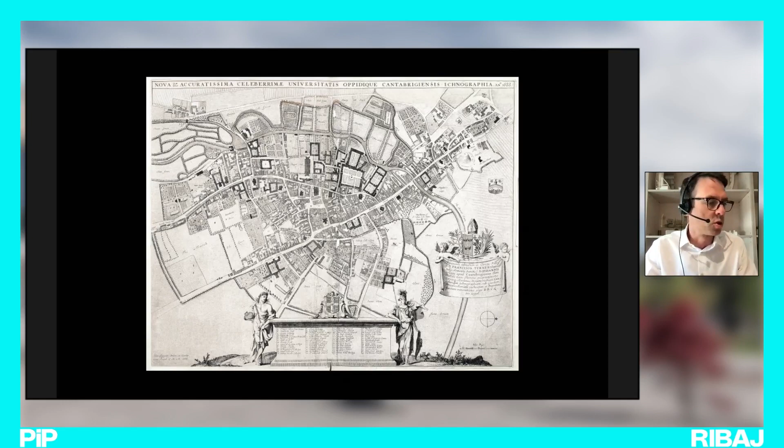This is a 17th century map of Cambridge, and you can see the colleges are hatched in black, showing the quadrangular arrangement of the colleges. The interesting thing about Magdalene is its position in Cambridge, outside of the city centre and beyond the River Cam, seen in the top right of this image. Legend has it that the Benedictine monks who set up the college placed it outside the city boundaries to provide seclusion for the monks and keep them away from the temptations of the town.

An amazing setting. Arriving through an arched doorway at the Porter's Lodge, you arrive into this enclosed space of First Court, enclosed by an amazing wall of brick, patched and repaired over the years, with windows set in stone tracery within it. Moving through that space and the archway ahead, you arrive in front of what's called the Pepys building, a curious mashup of neoclassical architecture with a medieval building. It seems a neoclassical face was put on an earlier building partway through its construction.

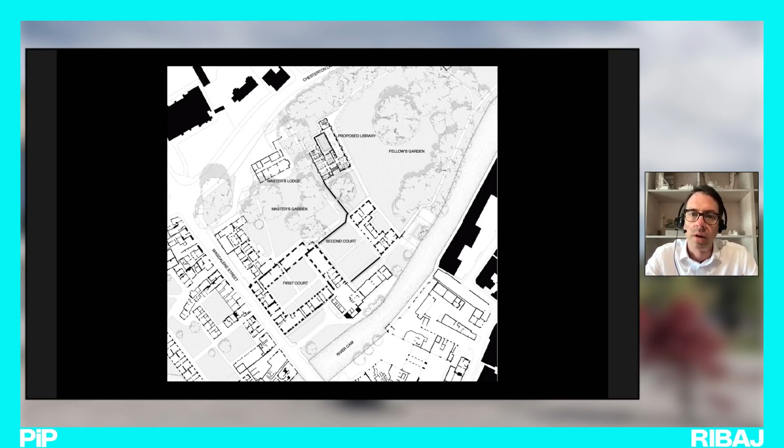In the middle of that image is where the new library was to be placed, in the corner of the garden, nestled amongst the trees. This plan sets out that arrangement—you can see the two courts, First Court and Second Court, and then this open-sided court we've made, where the new library sits alongside the existing Pepys library building, looking into the Fellows Garden.

So our design process began from first principles, the focus on the scholar again, looking at the very basic thing of the size of a desk. We were actually given a desk size in the brief, and so we tested that a bit as we built up our brief. And one of the things about the brief was that the college said that they wanted a variety of spaces, but they wanted to have a basic mix of 50% of the 100 reading spaces on shared tables and 50% on individual desks.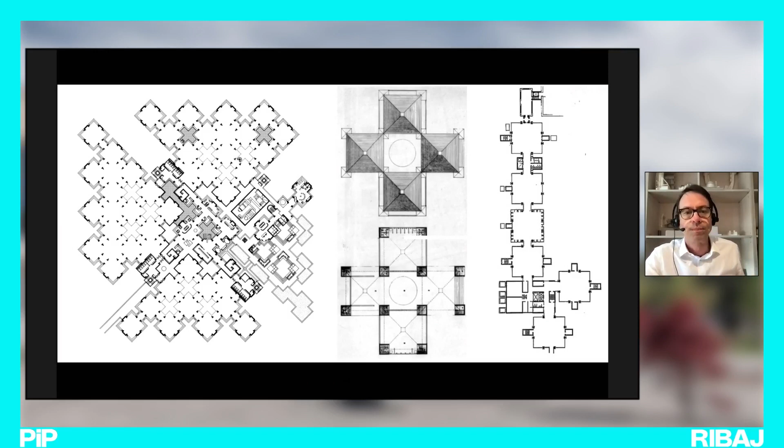And so I think Hertzberger was mentioned in an earlier part of this morning's session. We were fascinated by the plan of Centraal Beheer on the left there, and Louis Kahn's plans, which have this oscillation of major and minor components within the plan, and that formulation, a sort of tartan grid that they have, allows you to read the particle of the room within the plan, and at the same time to generate a kind of richness. And so this is our version of that kind of plan form.

The beige spaces are those square reading rooms, with the grey elements being double-sided bookcases, or sometimes external walls as well. And then setting these square spaces apart, there is a grid of passageways in white, which run in 2 directions. And so that allows you to get around the rooms without necessarily having to go into them. And it also generates a lot of surface area to put bookshelves onto. There's well over 1 kilometre of shelving in this building.

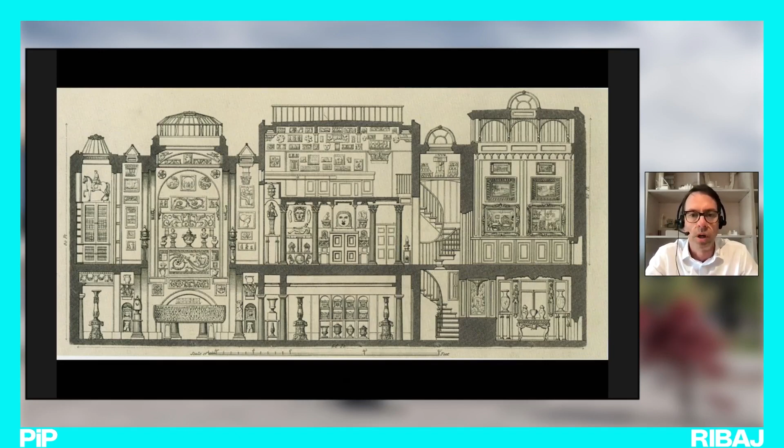And at the corners of these lanterns, the weight of the lantern is brought down on a brick pier, and these piers travel all the way up through the building, picking up the loads of each of the floors. It's a 3-story building, and then the roof construction sitting on top.

And working with the engineers, Smith and Wallwork, we developed this idea of a kind of a three-dimensional lattice where the floor beams pass through a collection of brick piers, which are in these L-shaped brick piers, which go all the way through the building vertically, and the beams passing through them, landing on lintels. So you get a kind of crossing of structure, which occurs at each of these crossing points on the plan.

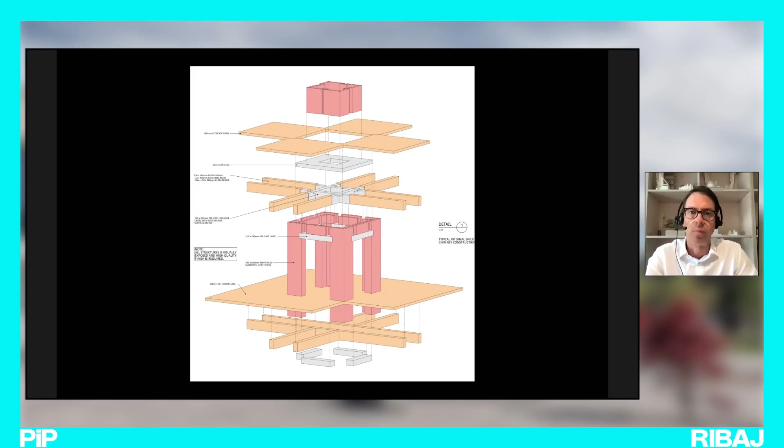And it creates this kind of knot, which we call the hashtag, where you see the timber laminated beams resting on the precast concrete lintels, which are then built into the brick piers. And these node points where we bring down the load, they also allow us to take out hot air as part of the natural ventilation strategy.

So there's a 24-hour a day, 7-day-a-week access library space, and the majority of that time the building is unstaffed. So the users of the library, the students, have to operate it themselves, and they have to make themselves feel comfortable. And Max Fordham and the engineers we're working with said to the college that a good way of achieving a sense of thermal comfort, which is a relative thing rather than necessarily objective thing, is to allow users to adapt their environment.

And so what happens is you get openings in the facades. They can be opened and operated by users to control the amount of cool air coming in. And then an automated system operated by the BMS allows hot air out through vents at the top, which is a combination of chimneys and vents in the pitched roof construction.

And that idea of a naturally ventilated building is quite a bold one in some ways for a college, because the temperature follows the external temperature, and so you don't get a consistent 21 degrees all year round, but it's also a more sustainable solution, and it gives you this idea that you can control your own environment. And it has some wonderful benefits, like being able to open a window and hear the birds singing, and it gives us this great array of chimneys and lanterns up at roof level.

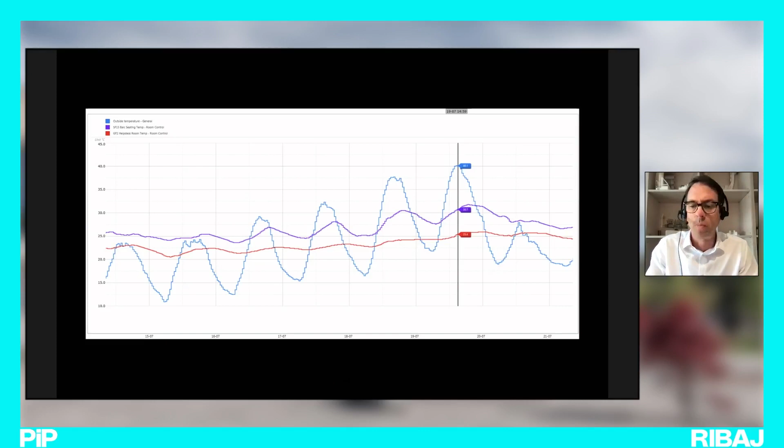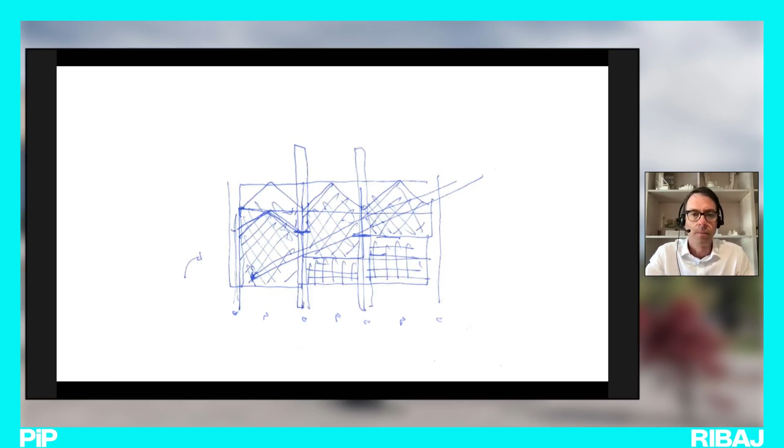And on the outside, the college was very concerned about how we would settle this new building within a space which had never been built on in the entire history of the college, and would be a significant new addition on their site. And so we talked about making a building which was made out of a suite of elements that you would find on their existing buildings.

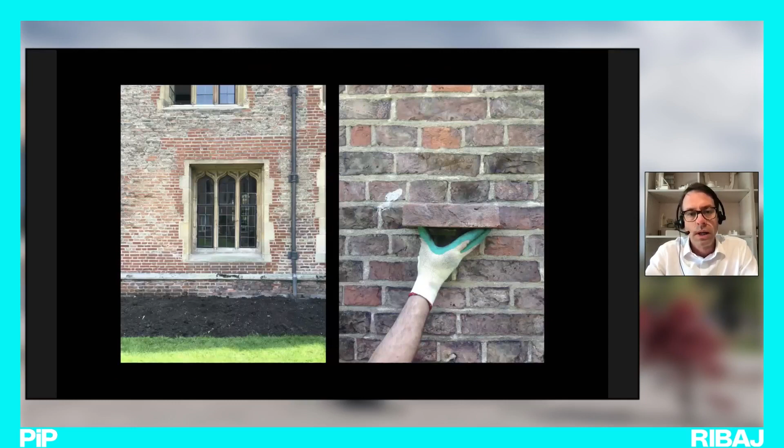And clearly it's a brick building. Most of the existing college buildings are brick, and they have this amazing tapestry-like quality of making and remaking over the years. And the brick tends to be sort of the reddish end of the color spectrum, but with a very large, thick mortar joint, which has quite an impact on the overall appearance. And so we tried to find a way of making brickwork which has similar quality. And this is our version of it.

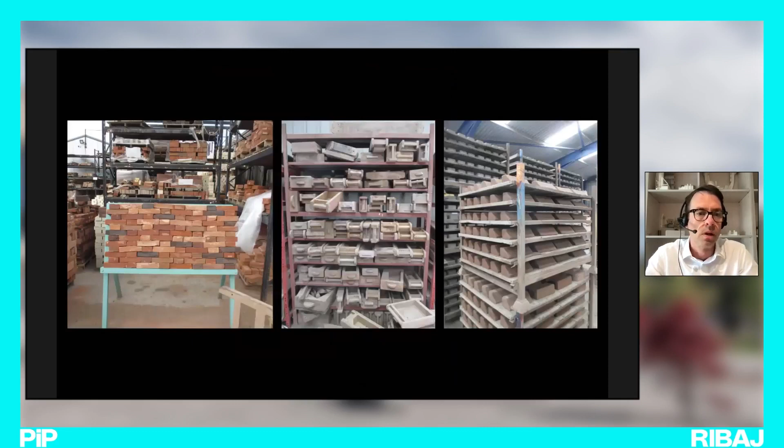So very thick mortar joints, flush pointed. The mortar joints are 15 millimeters thick rather than 10. And we've used quite a crumbly looking brick, which is slightly smaller than a standard size of brick, in 4 different colors. And they're handmade bricks made up in York by York Handmade, thrown into these timber molds before firing. An amazing manual process. And as part of that, we needed a large number of specials for bonding and detailing.

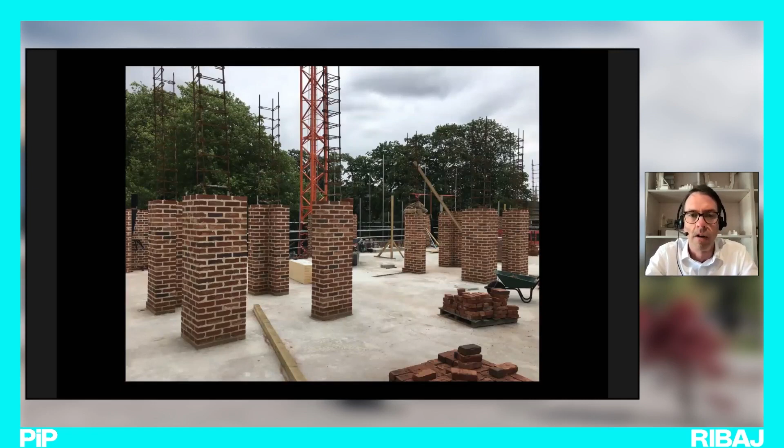So the bricks, the piers I talked about, they're load-bearing construction. They hold up the building. They have some reinforcement for tension in them. But also it's brick substantially on the outside. The external walls are load-bearing as well. And set into these walls, we have openings with timber windows and timber bays.

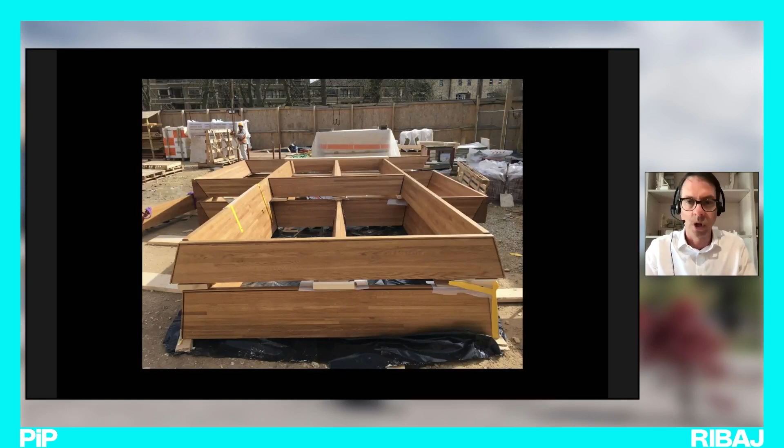And the idea for the materiality of the interior really was that there was a 3-dimensional lattice made of 3 principal elements: the vertical brickwork, horizontal spanning timber floor construction, which is made of spruce, glulam, and CLT, and then oak joinery. And so there are no finishes applied. What you see are those 3 elements on the inside.

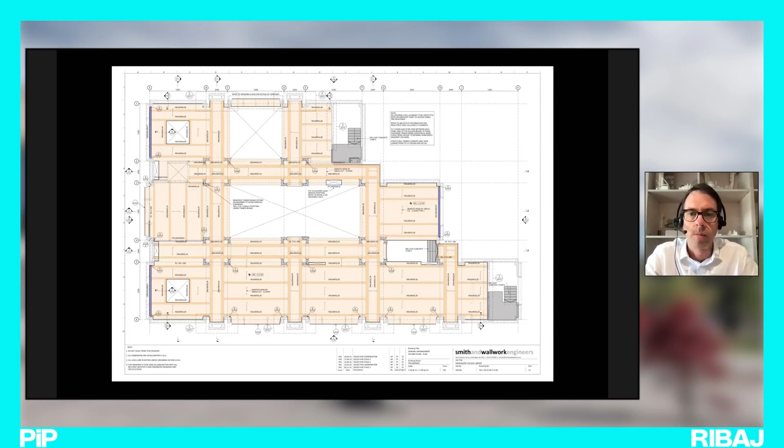And the glulam and CLT is a very important part of that. A lot of time we spent getting the quality of that right, working with specialists, the engineer, and Eurban, who did the CLT, and Neue Holzbau, who did the glulam. They're a Swiss company we've worked with in the past. This is the engineer's layout showing the glulam beams and the CLT slabs. And it's an engineered product. Obviously, the glulam is the highest grade that you can get structurally, so that the beams can span without steel flitches within them.

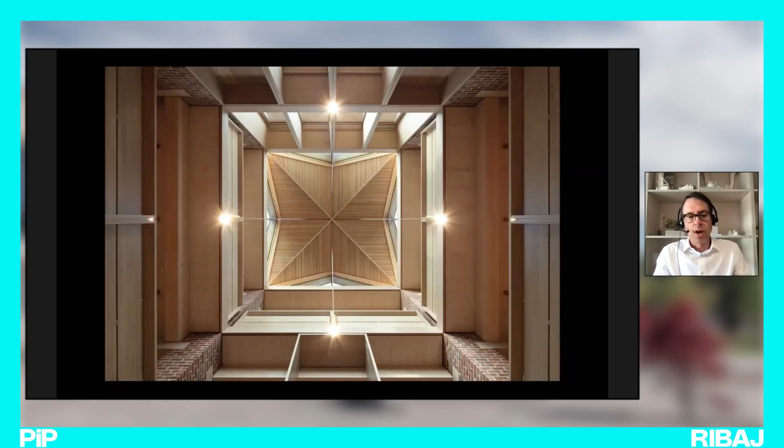As you can imagine, there's some tolerance in a brick pier of 3 stories high. So there was a bit of jiggling to get the lanterns to sit nicely on top of them when they got to the top. And then there's a real challenge for the joiners who had to then produce all the linings to get these kind of soaring verticals and everything to line up nicely.

And these guys built these, the linings of the soffit of the building, which is the principal area of acoustic absorption within the library. It's an open plan library, and obviously the right kind of fairly hushed acoustic is an important part of it.

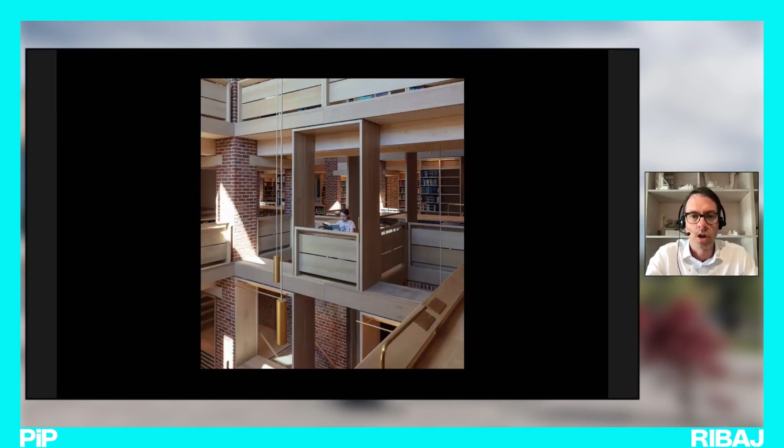And so that's what we end up with on the inside, with the roof lantern illuminating those spaces on 4 sides, this acoustic lining to the ceiling, and then all the joinery set within those surrounding walls.

And I'll leave you with the last space, which Carl's referred to, the best seat in the house, overlooking the 3-story void. We just had a bit of fun with the plan here and finding a location for the sort of most ostentatious seat possible. This is actually Niall's daughter reading a book there. Thanks very much.

Thank you very much indeed, Tim. It's a shame, probably said it when we were talking about the building when it won the prize, that, not being a public building, you can't actually go in and see just how satisfying a space it is to walk through and no doubt to study in. And if anybody has the opportunity to go to Magdalene and take a look, if they are doing tours of it, it's well worth it.

I think what's interesting about it is the fact that you've taken that very simple central idea. You almost look at it in plan as if it's some form of microprocessor, just these repeating elements. But the volumetric complexity you get as you walk through the building, you don't really get it from the plan.

You don't really get it from the section, to be honest, even though the section intimates it. It really is one of those buildings that you have to walk through in order to get how subtle those changes in spaces are and views through. I'd like to think you did a lot of physical modelling of it, because I think that's the only way you'd really get an idea of what it feels like, maybe even more so than a computer model.